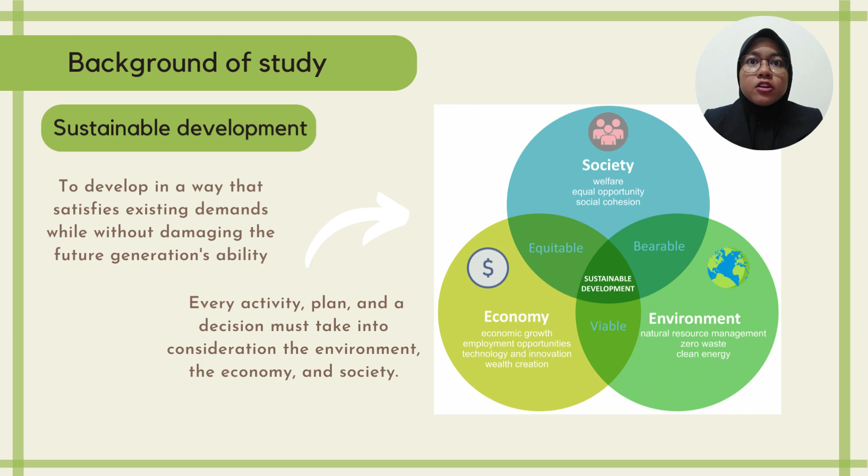Assalamualaikum. My name is Nurul Zulaikha, matric number CF200132. I will start my presentation with the background of study. Sustainable development can be defined as development in a way that satisfies existing demands without damaging future generations' ability. Every decision must consider the environment, economy, and society. Green Building Index was created for planners and builders to create environmentally friendly structures while minimizing environmental effect.

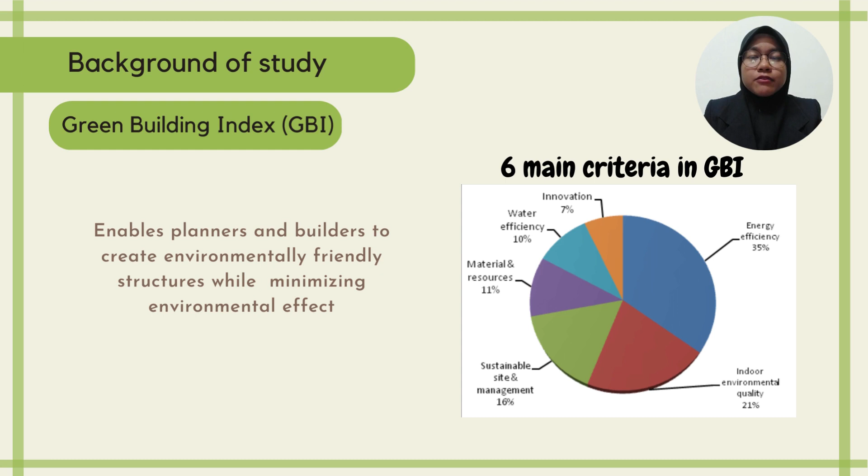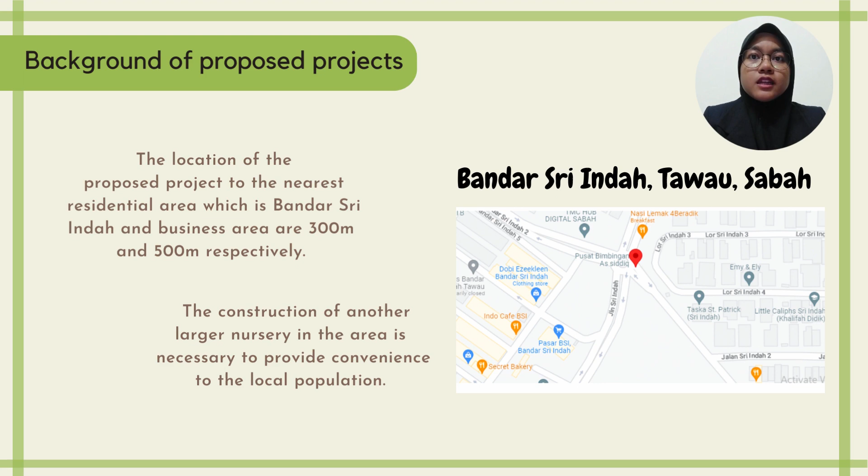The location of the proposed project to the nearest residential area, which is Bandar Sri Indah in Tawau, Sabah, and business area, are 300 meters and 500 meters respectively. The construction of another larger nursery in the area is necessary to provide convenience to the local population.

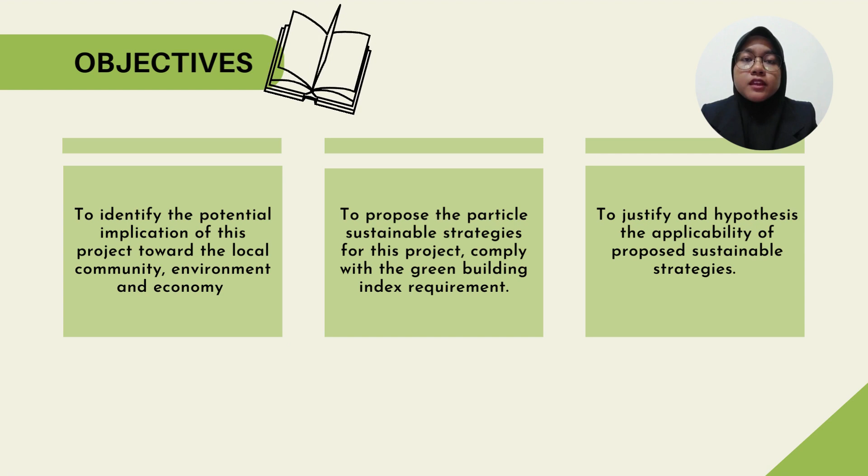The objectives of this project: firstly, to identify the potential implications of this project toward the local community, environment, and economy. Secondly, to propose particular sustainable strategies for this project complying with the Green Building Index requirement. And lastly, to justify and hypothesize the applicability of proposed sustainable strategies.

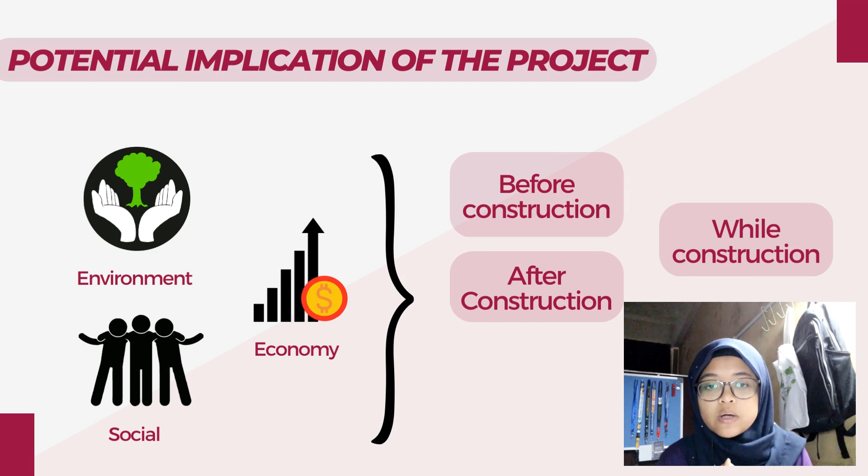My name is Nuradila Binti Lile, matric number CF200200. I will continue the presentation about the potential implications of the project. We divide these into three main parts: environment, social, and economic. For these three parts, we further divide into three main stages: before construction, while construction, and after construction.

Impact towards the environment: before, the place already faces pollution, maybe slight pollution due to vehicles, the small factory in the business park, and other energy consumption in the business area or residential nearby. While construction, we predict the pollution the locals face will increase more due to construction activity including heavy machinery, heavy vehicles, and heavy activities such as piling.

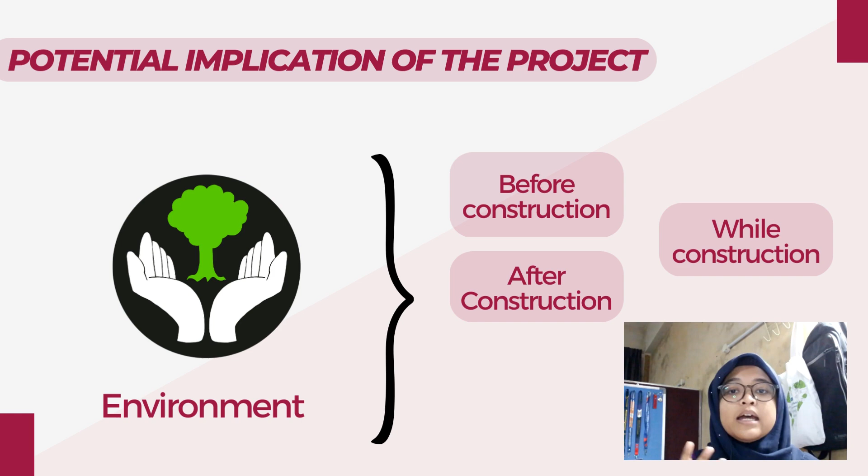After construction, research has already proven that the environment inside the building will be 5 times more pollutant compared to outside, because the more energy consumed inside the building, the more harm it does to the environment. For the social impact, before construction, the place gives an impact towards the local residents due to traffic jams, especially during peak hours.

Some residents need to send their child to other far nurseries. While construction is conducted, we predict the traffic jam they face will get worse because some roads may need to be closed due to safety and other cases.

After construction, it will save time because at that particular place they already have a nursery for their child, and they can also walk to send and pick up their child.

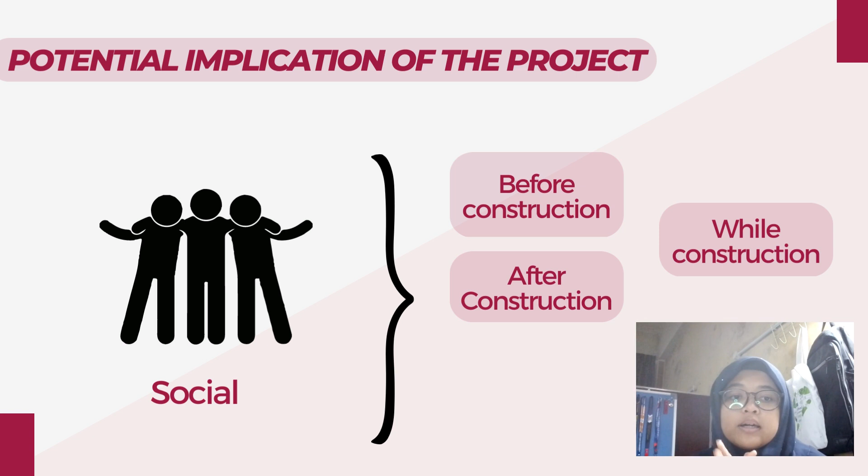For the economic impact, before construction, the place is one of the economic activity targets because of the strategic location, near the residential area and business park. While construction is conducted, this project will have an impact on the economy because it will increase employment opportunities for local people.

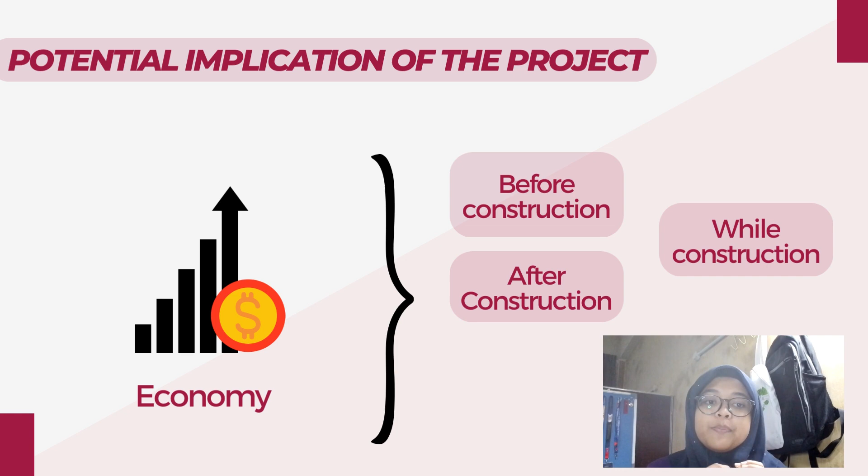And for after construction, it will still be a strategic place for a commercial center, and many people will be attracted to live in the nearby area.

Hi, my name is Syazana Binti Mazlan, my matric number CF200096, and now we're talking about practical sustainable strategy for developing a sustainable nursery and kindergarten. Let's go.

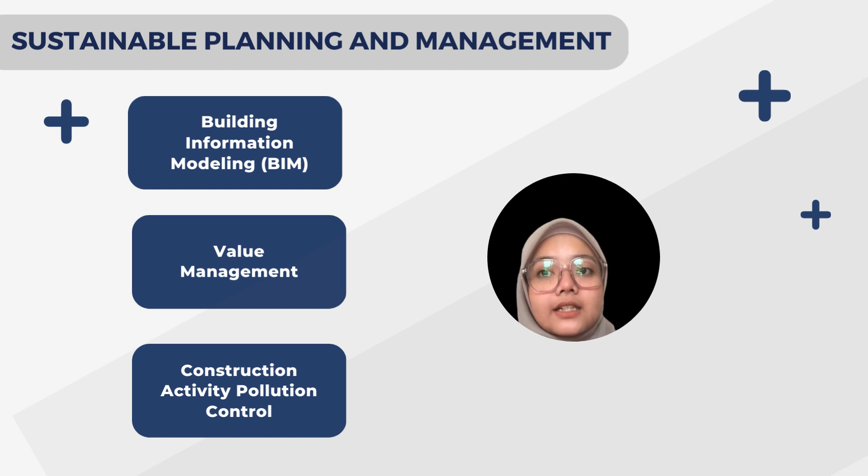Sustainable planning and management: first, Building Information Modeling (BIM); second, value management; and third, construction activity pollution control.

Hi and Assalamualaikum. My name is Sharel Amri bin Axzimi, my matric number CF20019. We have 4 proper designs of building: first one is building orientation, second is selection of window, roof cooling, and last one is rainwater harvesting system.

For the building orientation, it's important for the ventilation system and natural lighting. This ideal orientation can allow maximum daylight into the internal building and less electrical use.

For the selection of window type, it's also important for the building design, as the window not only provides daylight into the building but also provides natural ventilation. This is because this type of window is able to keep the building cool while at the same time providing sufficient sunlight into the building.

Cool roof concept, which can reflect more sunlight, lower overall building temperature, and save energy by reducing the temperature of the roof by 6 degrees or more. The nursery and kindergarten can also have a rainwater harvesting system installed to store rainwater.

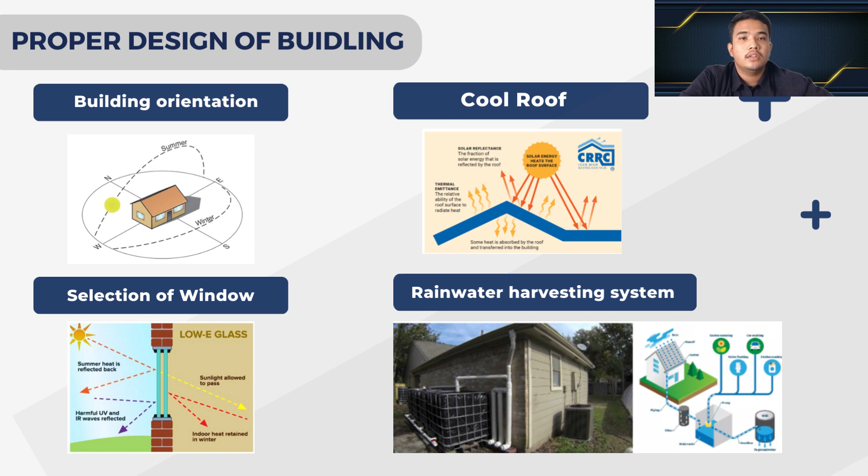The stored water can be used for landscape irrigation and general facility use. This can reduce the demand on water supply and save energy consumption, where energy is used to pump treated water from the water reservoir to the house.

Construction is one of the aspects that can guarantee building sustainability in order to reduce environmental impact. It has 3 parts. The first one is product content recycled material, like green concrete, which is manufactured using waste material and produces less CO2.

The green concrete can reduce at least 30% of carbon dioxide, CO2, and increase 20% use of waste product. Second is avoid using harmful products like volatile organic compound, plastic, and byproduct. The selection material uses low VOC paint, natural and eco-friendly paint that has less odor and reduces impact on air quality. The last one is IBS.

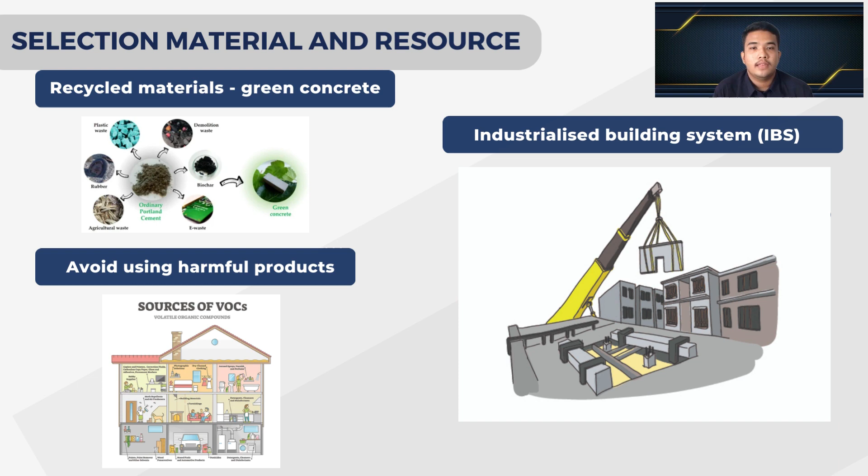IBS is technical construction research. The benefits of using IBS are decreasing construction time on site, cost saving, avoiding waste, more quality, increased site safety.

So now we go to energy efficiency. We have three: first, smart HVAC; second, solar panel; and third, 5-star energy appliances.

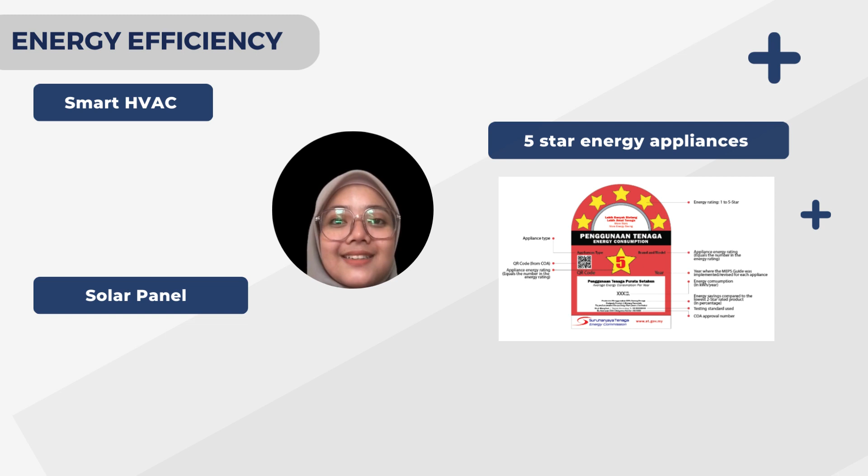Next I will continue to present the hypothesis of the application strategy in our proposed nursery and kindergarten. Before that, my group member already presented what strategy we propose for our nursery and kindergarten. Next I will explain the hypothesis if we apply that strategy. So here is the front view, side view, for our proposed nursery and kindergarten.

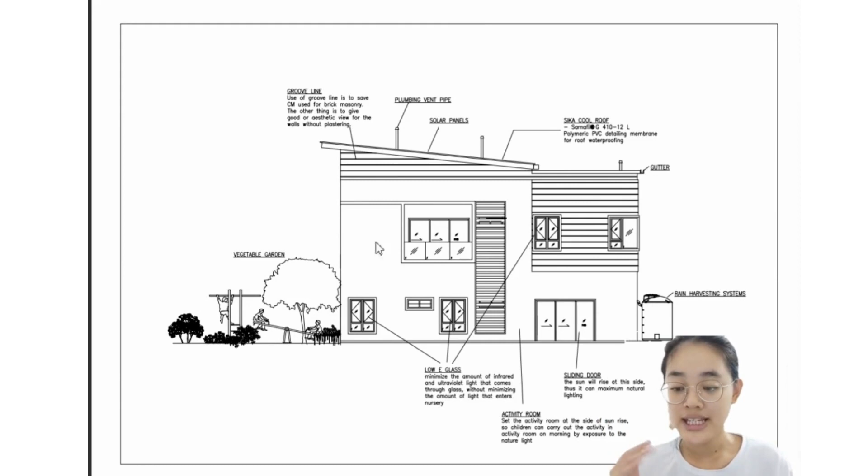The first strategy we use is the solar panel. As we know, solar panel can be an alternative source of electricity for our house, so it can save a lot of cost and also use less electric power produced by burning coal, so it will protect the environment.

Next strategy is the cool roof. The cool roof brand we propose is Sika, where they have a surface solution that sprays on the cool roof, and this solution can reflect the heat so it will absorb less heat into the room. This can reduce the mechanical ventilation in our room like the air conditioner, and will indirectly reduce energy consumption and reduce the urban heat island.

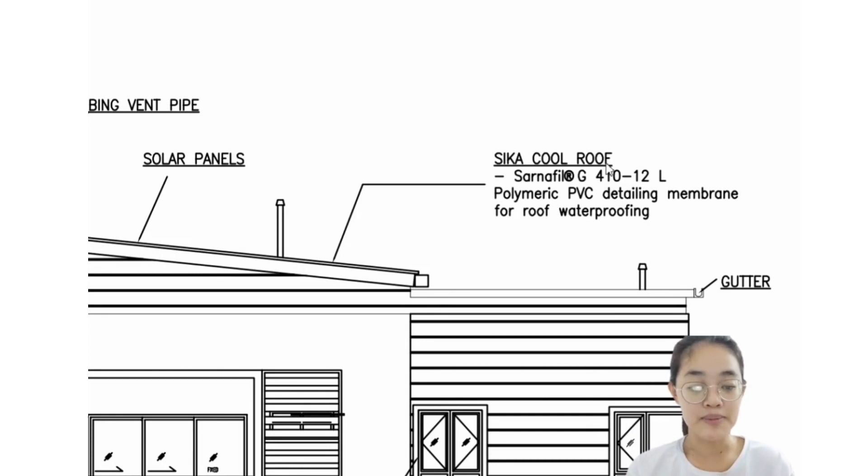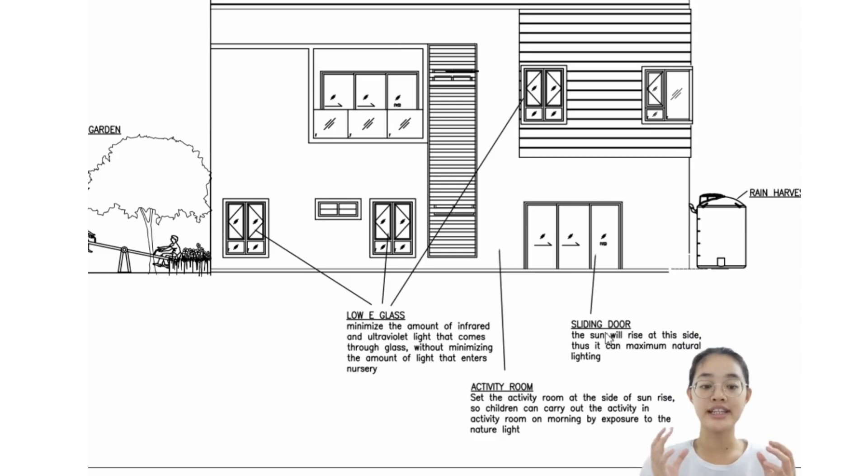Next strategy is the sliding door. We have proposed two sliding doors at the west side and east side, where the sunrise and sunset happen, because it can maximize natural light entering the room, while during afternoon or evening it can reduce heat directly entering the room. We also suggest that the activity room be set up at the place with a sliding door, because children normally carry out activities in the morning and evening, so it will provide a good healthy environment for the kids.

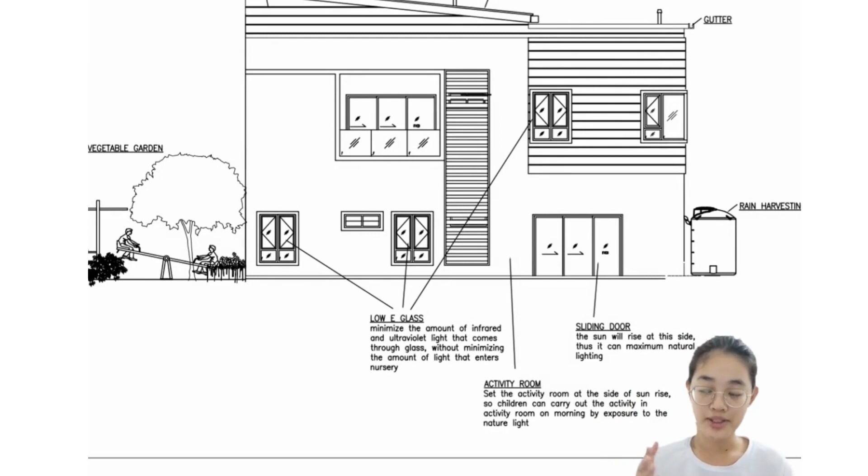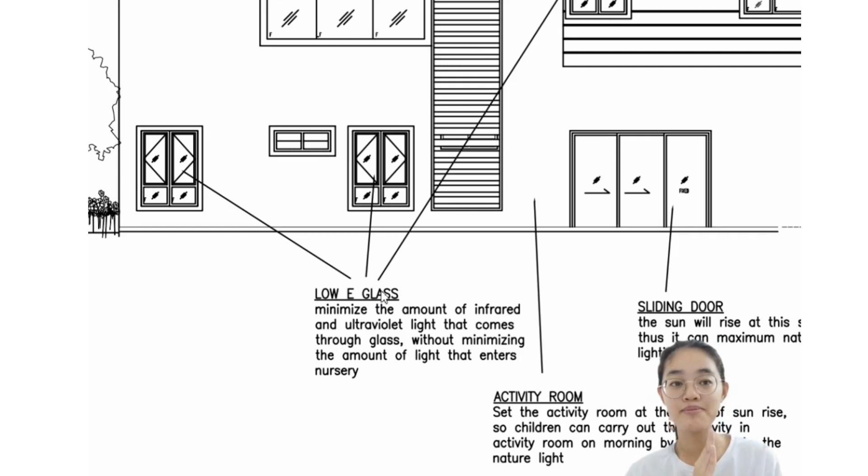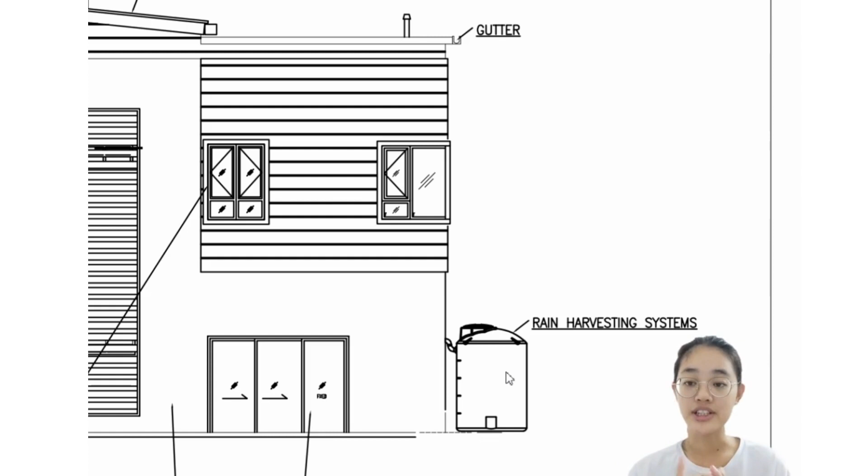Next is about the rain harvesting system. As Malaysia has a year-round rainy season, we can propose the rain harvesting system. We have a gutter to collect the rainwater and runoff. The rain harvesting system will store the rainwater in a water tank, so it can be an alternative water source used for irrigation and general facilities, providing water efficiency for the nursery.

Besides that, we also propose a vegetable garden for the children, which can provide fresh air for the kids, because the surrounding area is a business area and also a residential area. So if we have a vegetable garden for the kids, it will be best for their activities.

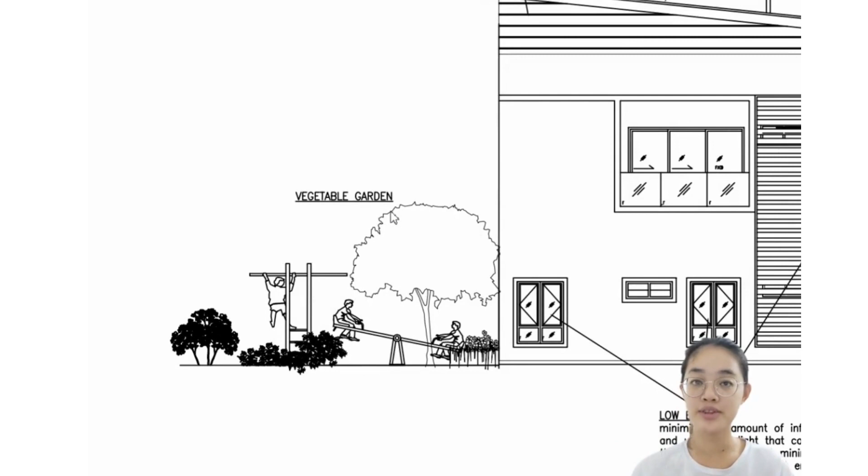Next is the front view. So here is the front view.

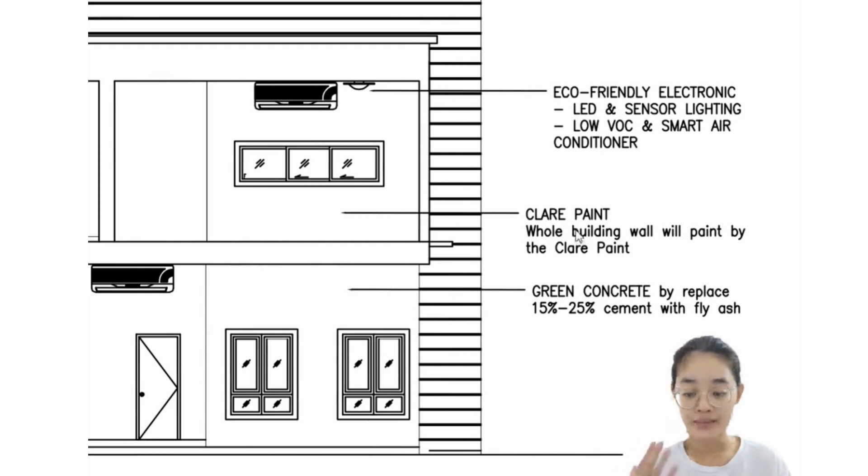We proposed the whole building wall be painted with Clare Paint. Why did we choose Clare Paint? Because Clare Paint is one of the environmentally friendly paints, and is a product that produces zero VOC gas. VOC gas, as we know, is one of the harmful gases to people. So producing this paint can also reduce unpleasant odors and provide low chemical emissions, which is good for the health of the kids.

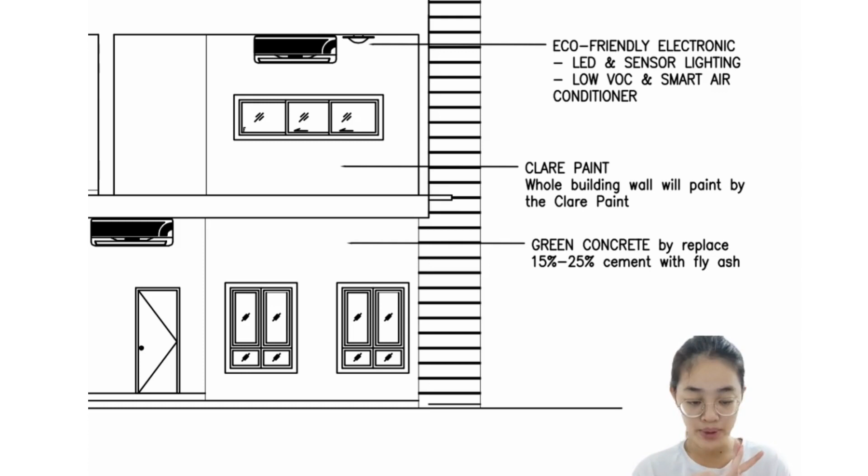Next we propose green concrete by replacing 15% to 25% of the cement with fly ash. As we know, when we produce concrete using cement, it produces a lot of CO2 emissions. So if we reduce the percent of cement in our concrete by replacing it with something like fly ash, which is a waste material produced by coal power plants, it can reduce gas emissions, CO2 emissions, and also reduce waste disposal by replacing partial cement in the concrete.

Lastly we also propose eco-friendly electronics, like using LED sensor lighting or smart air conditioners. That is because it will save a lot of energy, like the sensor light will save energy, and it will also produce less harmful gas emissions. So that's all for the part of the hypothesis of the strategy applied for the kindergarten.